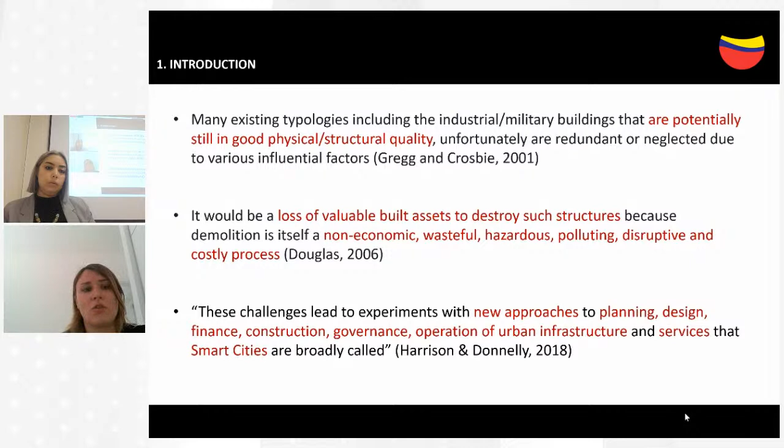This is why the smart city concept and approach emerged. Because of these concepts, there are new tendencies ongoing, and we can see that smart buildings is one of the smart city components.

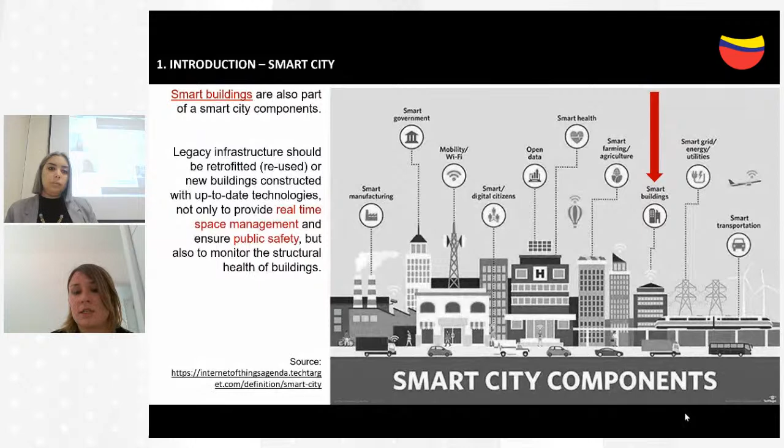So that means the smart buildings and the retrofit, or so-called adaptive reuse, is part of the smart city concept. Regarding Skopje and its national strategies, between 2010 and 2016 the country developed national strategies on creative industries.

This happened by creating a certain mapping of the cities, initiated by the Ministry of Culture. This process is encouraging and enabling the creative potential of the recent culture in Skopje and the art production.

It encourages people and organizations to get involved with such complex processes and to find proper heritage buildings that could be potentially reused and actively contribute to the society and to the lifestyle of people.

So instead, these kinds of buildings, once reused, would promote art and cultural events. They would collect the creative potential in the city and contribute to the local lifestyle and to the city's definition. Not only that, in Skopje these new aspects are supporting the creation of cultural routes within the city.

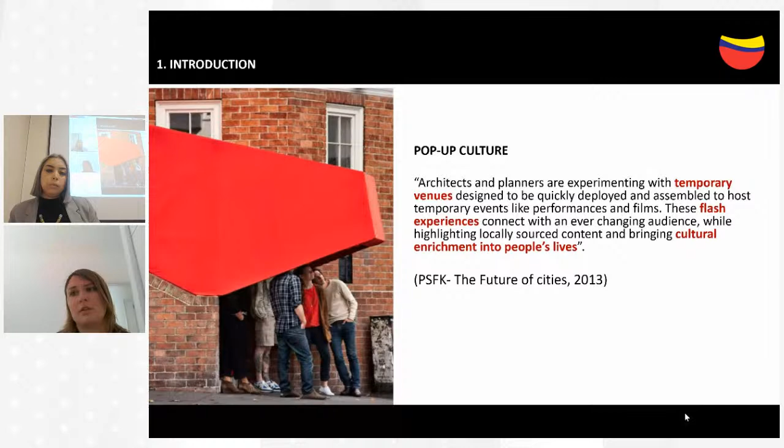The creative clusters always find proper places that are completely forgotten in the city and derelict, and through art and creative engagement, they revive these corners and try to bring collective benefit to that place.

Another keyword related to this topic is the urban canvas. These spots in the cities become targets for artistic endeavors and considered redevelopments that engage citizens and share experience and conversation through collaborative, co-creative approaches.

So basically these spots become, from very neglected and forgotten spaces in the city, a specific route for citizens to engage in different events and creative organizations.

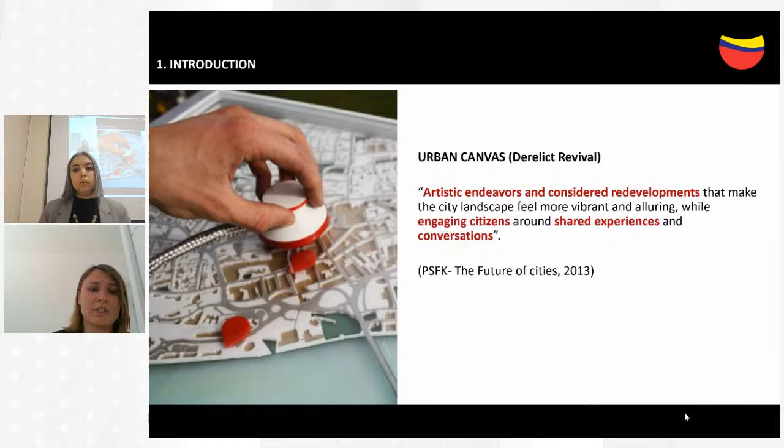So we have stakeholders: the building owners, the authorities, the planners, the communities. The strategies can be different for adaptive reuse specifically. They can be either insertion, installation, addition, extension, or specific intervention.

There are different design approaches. With adaptive reuse approaches, we can follow a contextual approach, a contrast approach, or a building that is within the building or over or above it. So there are different design approaches for reuse buildings.

Of course this follows with lots of feasibility studies and degrees of protection. If the heritage building is protected, there are many other obstacles that need to be fulfilled and respected, including involvement of the local communities and their opinion on what they need in that specific environment.

Deep and profound analysis of the existing situation, both at macro and micro scale, especially the nearest context at micro scale and at macro scale for the specific building. It's needed for the decision of the conservation actors and working teams to come and decide what kind of possibilities they can open for that heritage building.

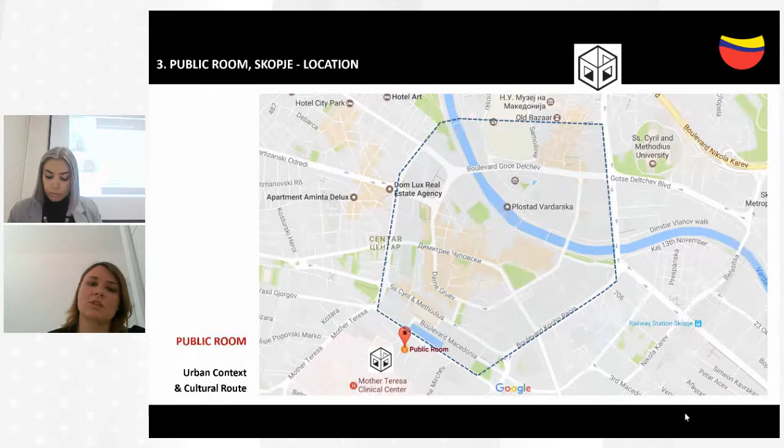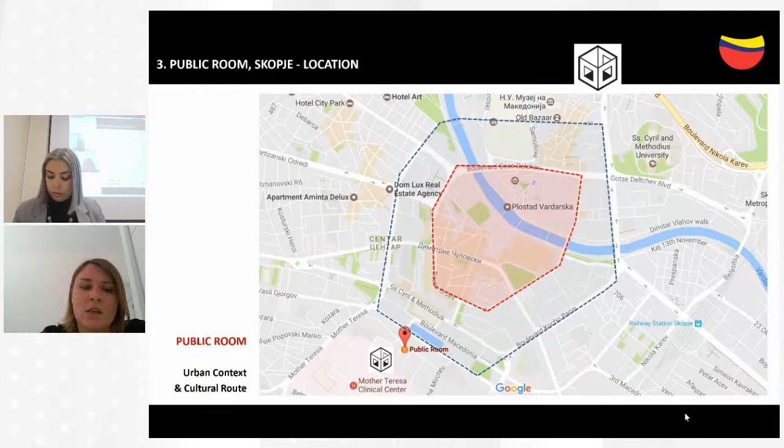This is called the Big Ring. The urban plan after the earthquake in 1963 came from Kenzo Tange's project, and it is partially implemented. As we go closer to the city center and the main square, this is the so-called smaller ring, which targets all the main functions and cultural buildings, targeting a specific route.

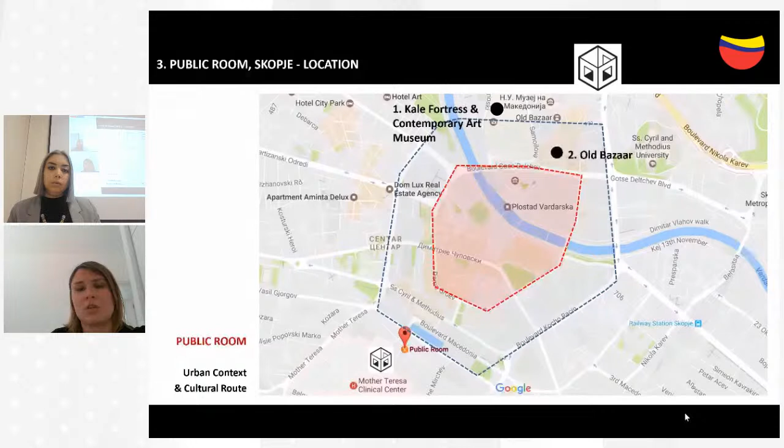For example, this is the location of the Kale Fortress, an important landmark in the city. Next to it is the Contemporary Art Museum, another very important facility built afterward. Then we come to the Old Bazaar, which spreads throughout the right bank of the river Vardar and is a huge part of the city. Then we come to the city square.

This is the main square of the Skopje capital, and it connects to the Skopje City Museum, which was previously an old railway station. After the earthquake it partially collapsed, and that old railway station was reused as a city museum.

Public room, a small station, so-called National Gallery and Multimedia Center, is in the nearest context, very close to the old railway station, and it served as facilities. In that region we have all these warehouses and different industrial and military facility buildings that were along with the railway station, serving it. Now we have this legacy of such buildings that need to be reused.

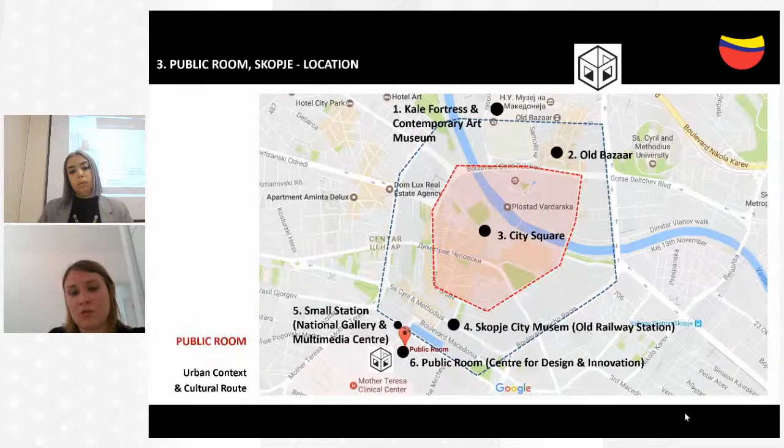And of course we are coming to public room, which is targeting the bigger ring circle of the city, and again it connects from one bank of the city to the other. This is the so-called cultural route of the city, which targets the very important landmarks in Skopje.

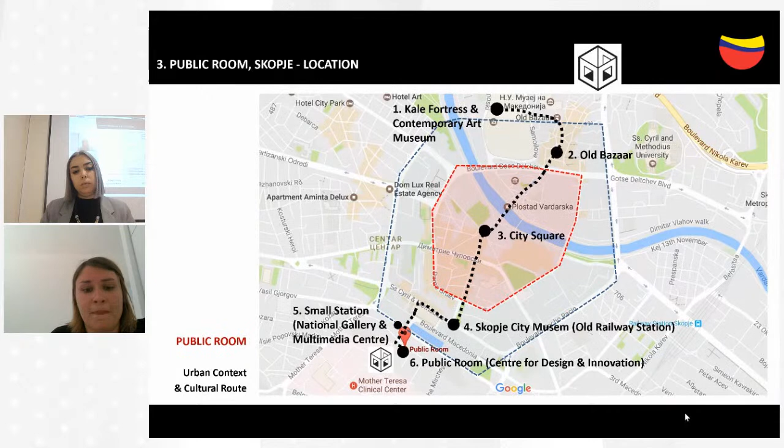If we make a close-up on the map, I would specifically mention that the building typology is industrial and military, because it's in the nearest surrounding of the old railway station. From 1920 this building was used as a stable and warehouse, especially serving military purposes and facilities, and they were kept there until 2015.

Still, the Ministry of Defense was having use of this building as kind of a warehouse, but it was neglected. The location was very close to facilities that had previously been reused, such as the old railway station and the small station.

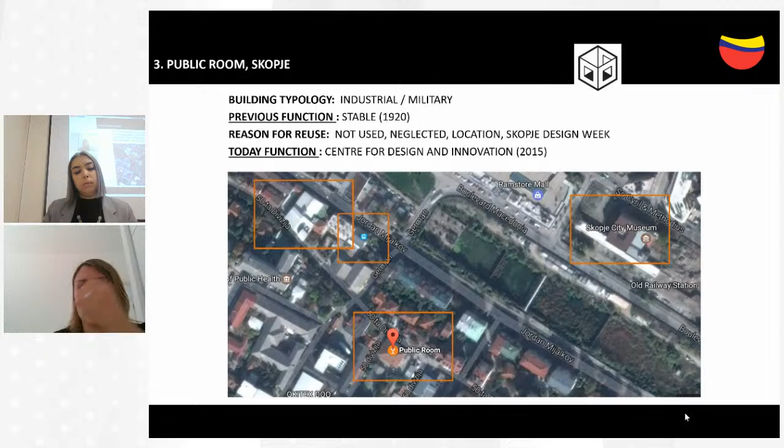So today, after the reuse, this center of public room is now a center for design and innovation. This is a small image of the small station - these are all warehouse typologies of buildings, and they were all serving the purposes of railway support.

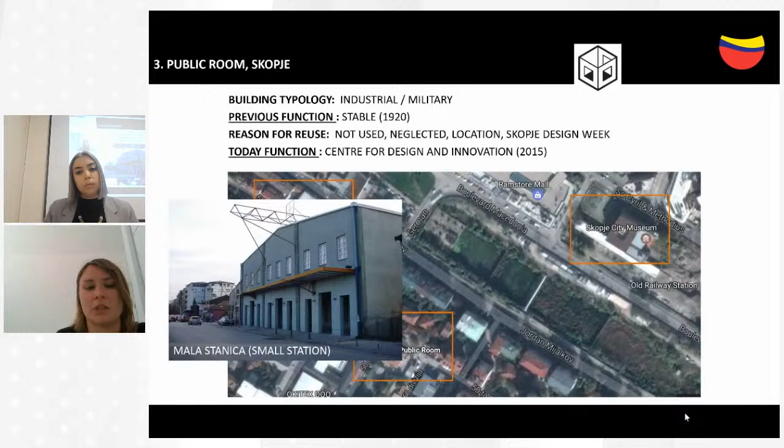And today, this small station is reused as a multimedia center, so it works very well. Public room is a very close distance to this building. This is station 26, currently working as a cafe, bar, restaurant and lounge area. They are all in the same district.

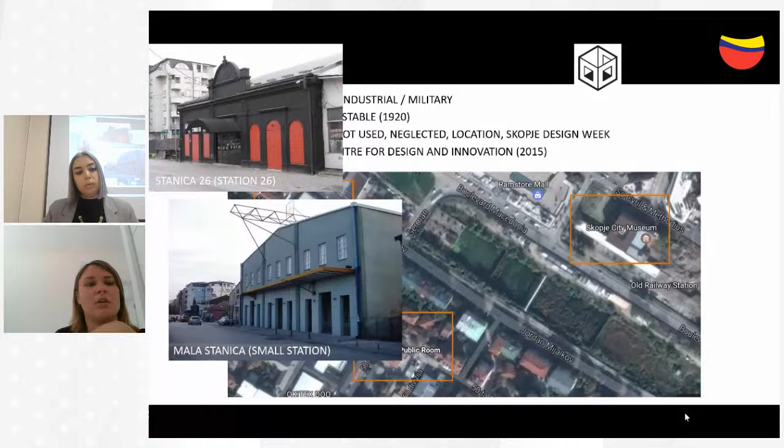This is how the Skopje old city museum and the old railway station looked like. You can see the left part of the museum - it collapsed in the very strong earthquake in 1963, and from that time it remains to remind citizens of the disaster of the city. Now it is functioning as a city museum.

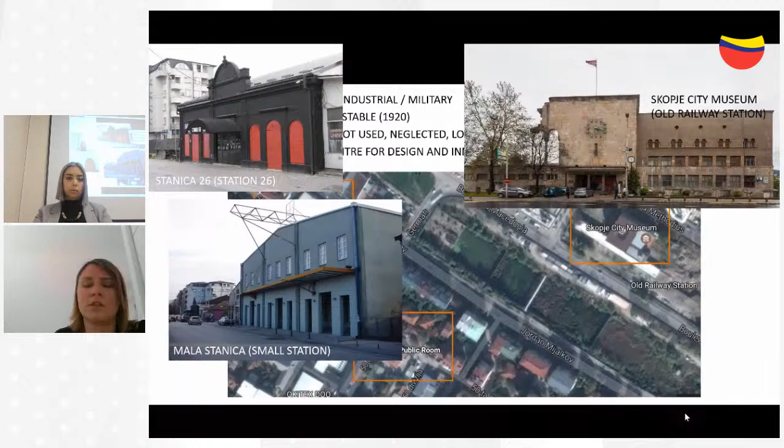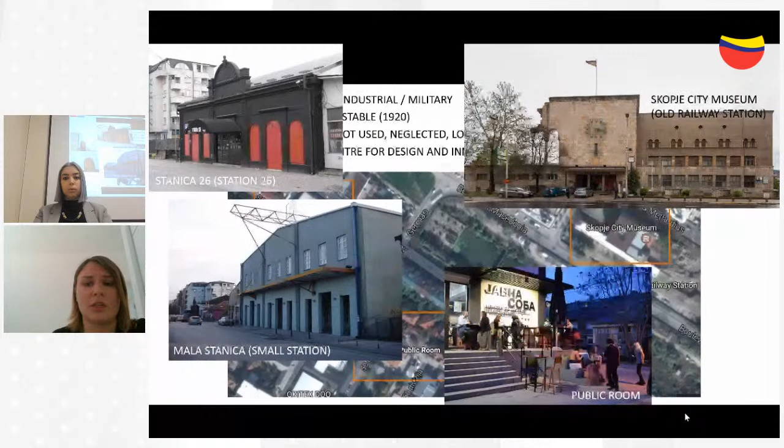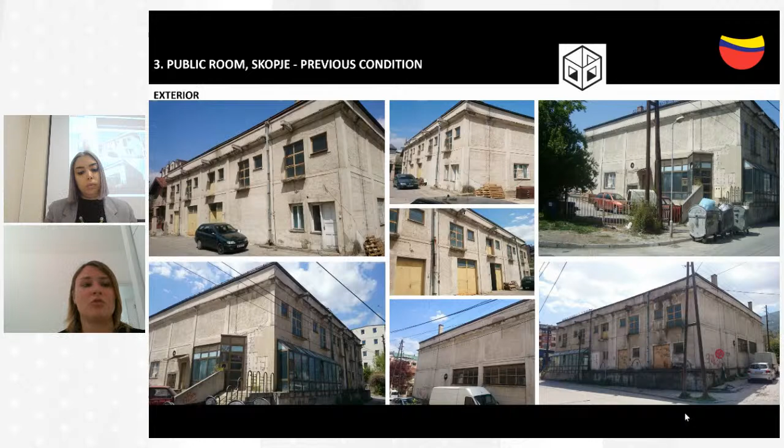So it was physically in good condition - the structure is still good, still available, and with small touches and additions, this could easily transfer into new conditions. They didn't need too much repair or ruining of the building envelope. This was the interior of the building, how it looked like.

Of course, the roof was derelict and it needed to be reused because it had proper height to be used. The condition was in a very awful state, so no one could use it.

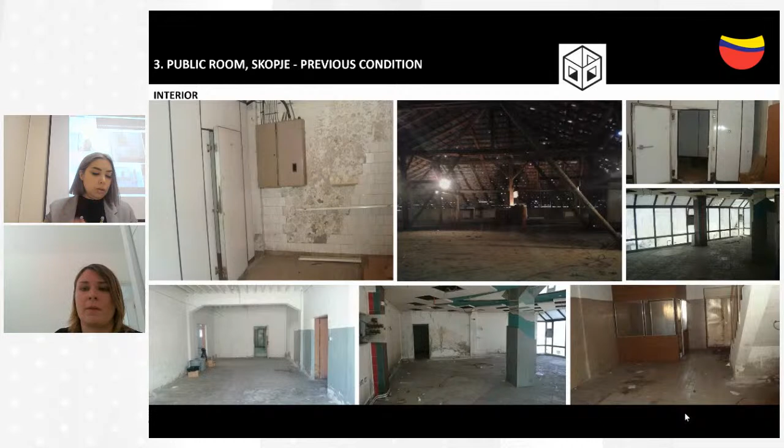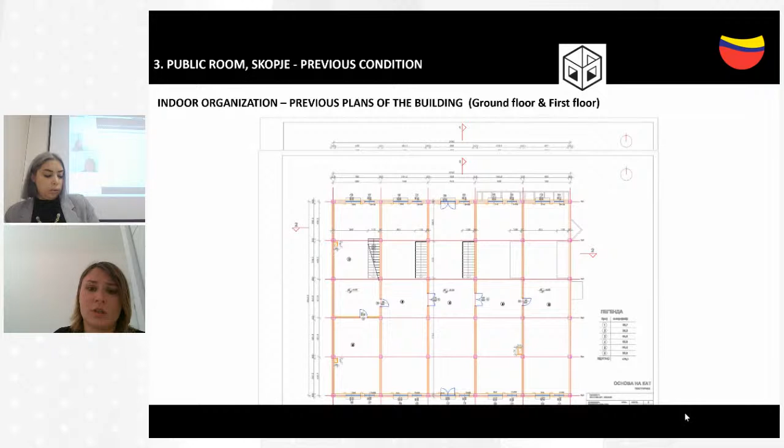So these are the plans of the building. It's a very simple structure and repetitive by nature. It had a skeleton structure, so basically the area was kind of easy to adapt into a new use of the building.

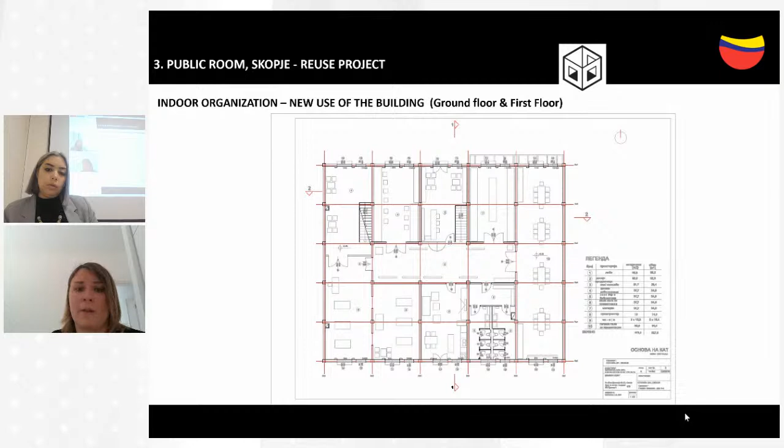After the project and other developing stages, new plans were proposed for how it would adapt and infill with very small touches without ruining the main structural walls, since some of them had massive structure. This was the first plan for how it could adapt into seminars, different kinds of multimedia rooms, kitchen, bar, and service areas. Basically, the building was governed by the Ministry of Defense.

As I mentioned, it was previously used for military purposes, but it was not sufficiently used and was completely neglected. The public room organization, which was the initiator of this new project, organizes the main event of the city called Skopje Design Week.

So they were in need of a new space, but they wanted a kind of heritage space, because this kind of event also needs proper space for exhibiting and workshops. Basically, the Ministry of Culture wanted a new function to be approved for this facility.

It was a long process until all the approvals from the Ministry of Defense and transfer of legislation were given to the public room organization to use the facility for specific purposes. After all these approvals, the possible modification of the building was done, and there was no specific strict protection applied because it is industrial and military heritage, so they didn't have any degree of protection, which made the process much easier to adjust.

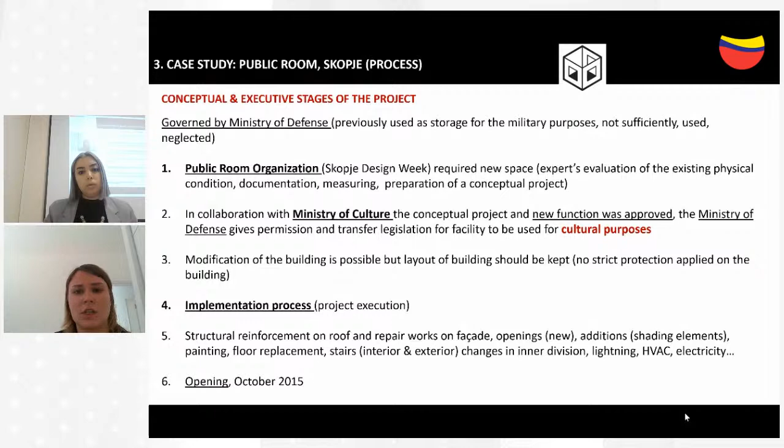In 2015, this building opened with all these projects and execution stages done. These are the initial renders, but the management didn't want it to be a military green building as initially intended - they shifted into different colors, because they didn't want to cause disturbances in the neighborhood, even though that was the initial idea.

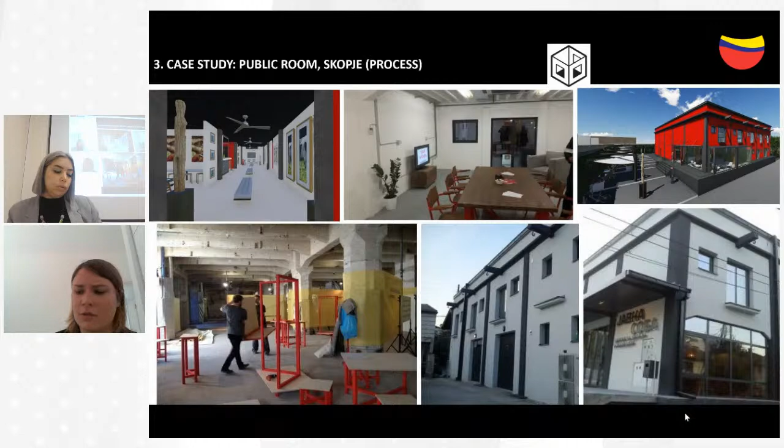These are part of the ongoing execution of the project stages. So today, this center works as a center for design and innovation. Basically, it's a new life in the city, and it has different kinds of activities.

It has free co-working spaces for freelancers. It has a concept store, a prototyping room for people who want to innovate and test their projects. You can rent places for personal events. There are commercial bazaars organized weekly, fine arts and photo exhibitions, and professional presentations.

There are workshops for cooking, workshops for children and adults. They organize business meetings, seminars, and different kinds of events, live music, and so on. So it's really a kind of anchor in the city, and it attracts lots of people of different age groups, from children to elderly.

Somehow it became a magnet for citizens to go into the city, and it is a really trendy place to be, because it's dedicated to gastronomy, creativity, design and innovation. People are in need of such places where they can feel free, work together, and organize their meetings and seminars there.

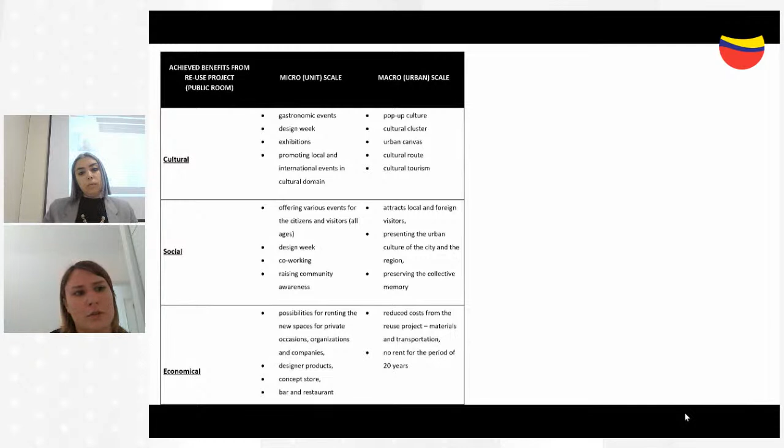Basically, the Ministry of Culture has a 20-year agreement. I think they allowed this organization to use this project. So after 20 years, if it is successful, definitely they're going to renew the contract and the agreement.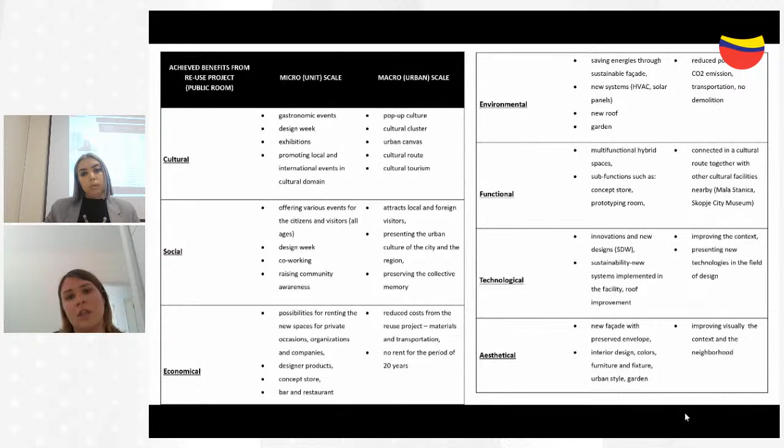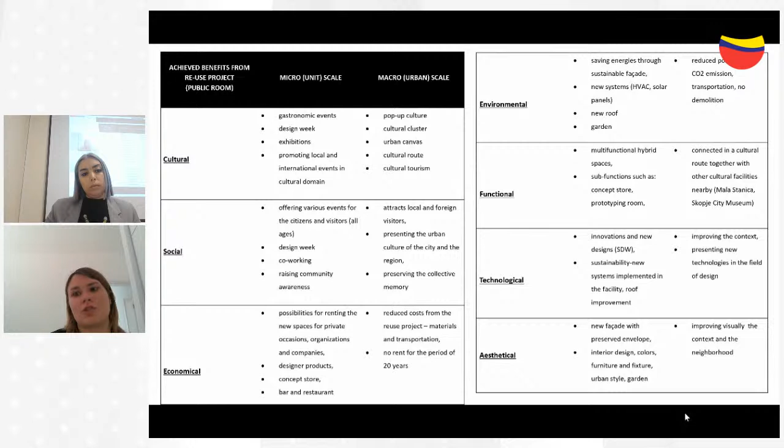Besides the cultural, social, and economic benefits, there are also environmental, functional, technological and aesthetical benefits. Overall, the start of this project didn't promise this amount of benefits, but after execution it turned into a different positive development and mainstream. So from a derelict and forgotten place in the city, now it is definitely an active anchor and magnet.

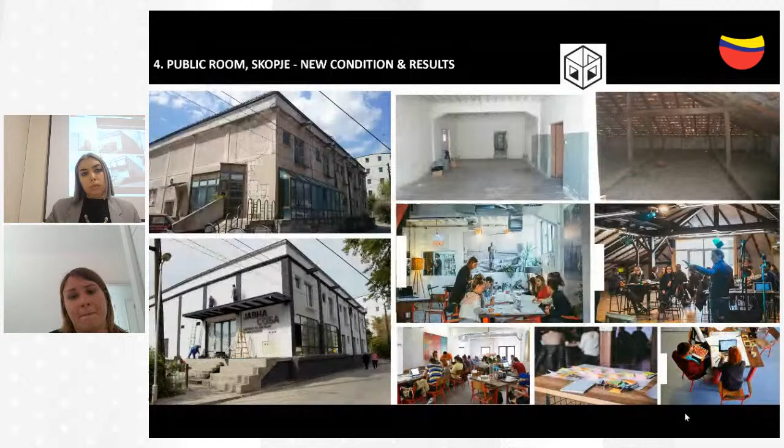So you can see some of the photos. They are trying to implement different kinds of green terraces, and different kinds of organic farming, which is a recent ongoing trend there. It's a really small scale building, but the effect is much bigger than it is.

You can see also different events during design week, how the workshops were organized and how meetings were done. There are gastronomy events, events for children, meetings, seminars.

Overall, I would highlight again the future of the cities. This building really is targeting the pop-up culture in the city, and it's really a creative cluster in the surrounding neighborhood. It contributes to the local economy, and it engages different kinds of groups and communities.

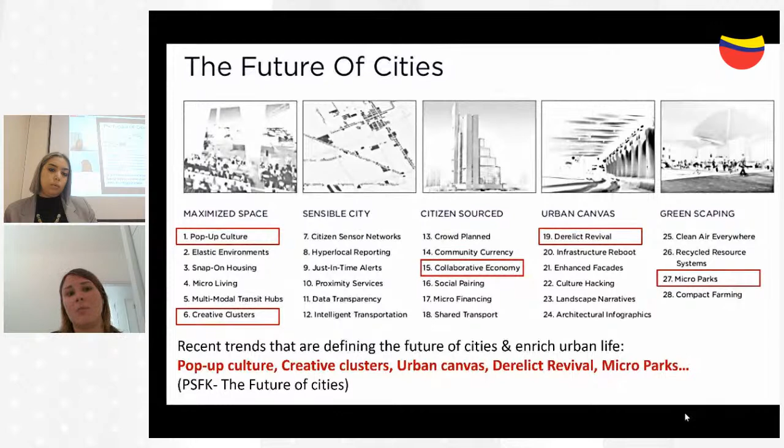So it is a revived space of the city, and definitely the tendency is for these facilities to implement more and more greenery, to become a kind of micro park and micro urban hub in that place.

Overall, I think through this reuse project, the pop-up culture was targeted, the creative cluster and revival of these derelict spaces was achieved, and a public room as an urban canvas allows artists and everyone who wants to collaborate to be engaged within that space.

This can show us that the cultural benefits of reusing former military or industrial heritage buildings can really bring benefit not just to Skopje and our country, but with proper analysis and proper selection of such a derelict building, it could bring benefit in any environment as well.